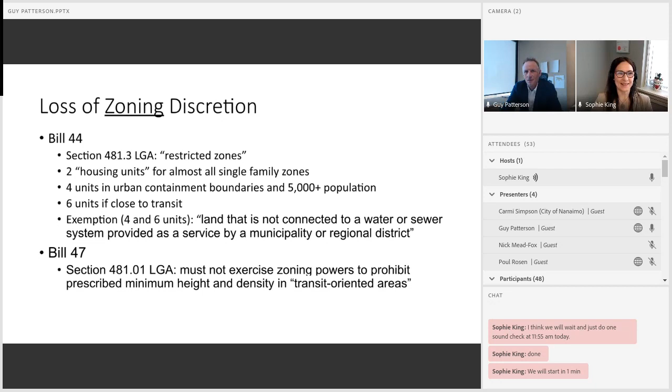Okay, thanks, Sophie. Hi, everyone, thanks for joining, thanks for having me, PIBC. So I did get a chance to look at most of the questions that were submitted in advance, and I'll hopefully try in my 15 to 20 minutes to address the gist of at least some of the questions that I think were most related to the area that I'm qualified to speak about, which is more on the legal side of the servicing and infrastructure implications of some of this new housing legislation, not on the technical engineering side. Obviously, we have others more qualified to deal with those aspects.

Anyway, so yeah, I'll try to focus on, in my practice, in my thinking to date on all this new legislation, what are the challenges, implications, and legal issues arising from the servicing and infrastructure implications of what really amounts to, I think I'm just starting to describe it as a fire hose of new provincial legislation. And now we have, at least as far as it's gotten to first reading, I'm not sure if it's gotten beyond first reading, we now have Bill 16 to add to the mix.

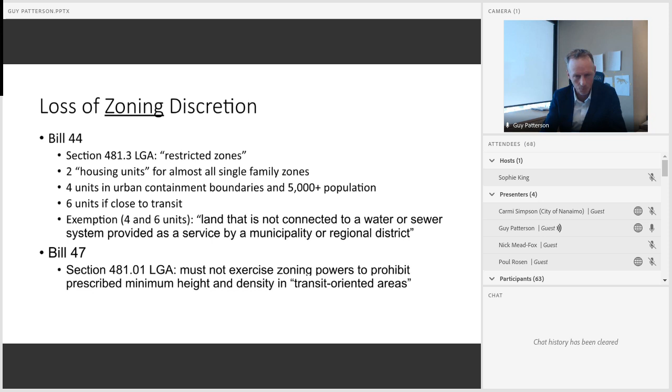So that context, that new context the province has created for planning and land use management decisions in local government, for local governments in BC, raises what I think is really the question that kind of underlies many of the questions that I read in the list.

Which I kind of try to boil down to the question of whether the loss of the zoning discretion that I've tried to describe translates into or necessarily equals a loss of authority to ensure adequate infrastructure and servicing for these new housing units that are now allowed as a matter of zoning.

So I want to emphasize, I underlined in the previous slide, there's the word zoning. My pitch, my theory here, or what I want to emphasize, is that it's only one feature of the local government's broad range of legislative and regulatory powers. It's only one small piece of that bigger puzzle that has been stripped away.

The only thing that these bills are forcing local governments to do is change zoning. No other legislative discretion or authority has been similarly stripped away. So what is left after these new housing unit density obligations is what we want to examine, right?

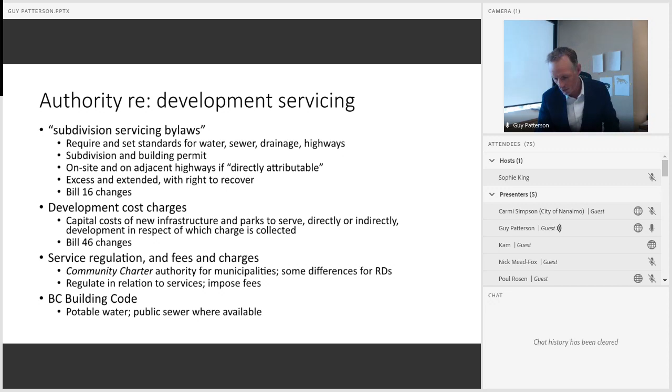So, ask and you shall receive. The legislature is giving you new authority to impose requirements at the subdivision and building permit stage to get more new kinds of works and services, including road dedications, in addition to the underlying authority for water, sewer, and drainage infrastructure at the subdivision and building permit stage. Again, all that comes after zoning.

My last slide: building permits can be refused for non-compliance with all relevant bylaws and regulations, not just zoning. So zoning isn't the only relevant consideration. The removal of the zoning discretion might not be the end of the world. The sky is not falling as a result of the loss of the zoning discretion. It just places a sharper focus and probably requires you to pay closer attention to the exercise of the other kinds of authorities that exist.

I won't touch on the very last question, other than to say I think probably the answer is no - that if zoning is available but works and services are insufficient, I don't think a local government is obliged to rectify the deficiency. The local government can force the developer to rectify the deficiency, or if the deficiency can't be rectified, refuse the issuance of the building permit, even though the zoning would in theory support it.

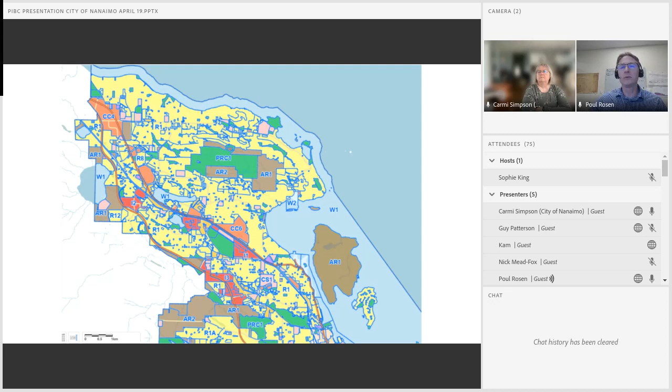Just in terms of background, the city provides water, sewer, and stormwater services to the vast majority of the city. To support those services, we have a citywide sewer model that's calibrated with actual flow information, and its level of detail is down to the parcel level, which is a little unusual but helps us quite a bit. The same goes for the water model. We also have as-and-when contracts with engineering consultants to help run the models and do the analyses for us, so we can go to the right folks and get answers fairly quickly.

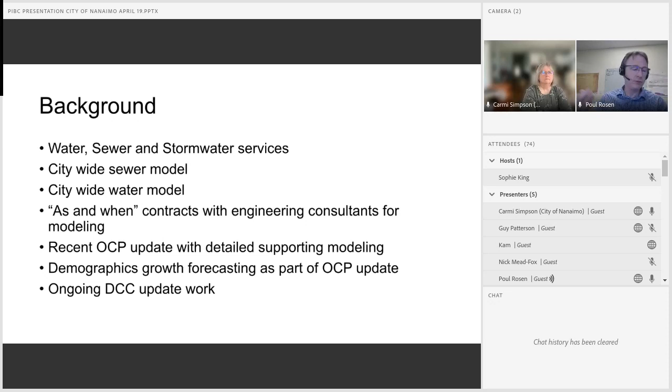So in 2023, we did a fairly major OCP update. As part of that, we did a lot of demographics evaluations and forecasting, and got a good understanding of the infrastructure impacts. So we were well set up to understand the impacts of growth going forward over the planning horizon. We're also in the process of updating our DCC project lists, and that work was fairly mature by the time Bill 44 hit in the fall, so we were well positioned to answer these types of questions.

Our water system has a little over 700 kilometers of supporting pipe and infrastructure. It's worth about $1.5 billion, and it's built over many decades. It's designed to meet engineering standards, and the pipes themselves have asset lives over 75 years in many cases. So these are really long-term assets, and it's not easy to go and replace them or upsize them.

Obviously we provide water for domestic needs, commercial, industrial process, and so on. But one of the key design criteria for the water system is actually the amount of fire suppression water that we provide. For single-family dwelling areas, our engineering standards dictate a minimum of 75 liters per second. Other zoning, like commercial and industrial, has higher flow rate requirements, like 200 or 300 liters per second.

A lot of that is tied back to the requirements under the Fire Underwriters Survey. They're a national organization that provides data and standards for the insurance industry. They periodically evaluate the effectiveness of fire protection services and provide a score that impacts the insurance rates within that area. So the score we get in Nanaimo with the Fire Underwriters Survey dictates how much people pay for their house insurance. It's a fairly important thing that we adhere to their standards.

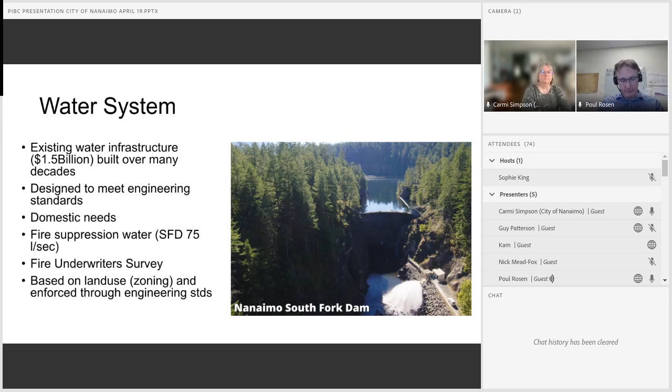Now let's move on to the sanitary sewer system. We have about 600 kilometers of sewer pipes. We provide the collection, we don't provide the treatment — that's done by the regional district. But an important point here is the minimum pipe size in our engineering standards is actually quite big, 200 millimeter diameter pipe, which is 8-inch diameter. It has a lot of capacity, and we do that more for operational reasons, to be able to complete the flushing, the inspection with cameras, and so on.

What that means is in the upper ends of a catchment, where they're like the leaves on a tree, there's actually a lot of surplus capacity in the network at those points. We also have, like I mentioned previously, these sort of pocket areas — some areas where we have low pressure sewers, and this Protection Island, which is serviced in a special way.

It's not just conventional gravity sewer, and with storm sewer, I put storm sewer up there too. We didn't spend a lot of time considering it because in our engineering standards, as part of developments, they are required to match the pre-development hydrograph with their development. So in theory, new developments are not going to contribute in any significant way to increases in storm sewer loading. So that came off the table fairly early on in our evaluation.

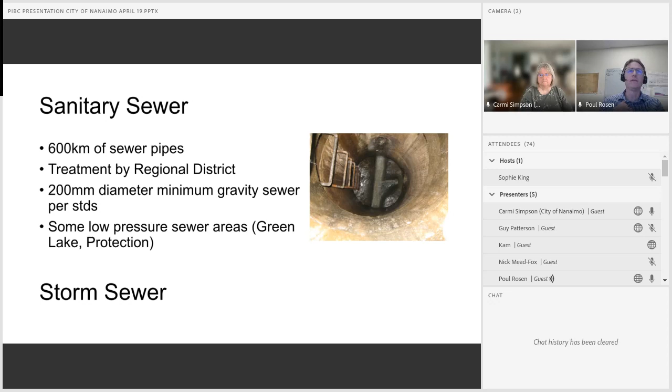So Bill 44 - when it hit, we already had substantial growth planned for. The difference was that the location of the growth was potentially now a lot less focused on urban nodes. Our OCP had envisioned that we would focus our growth ideally around these city centers or urban nodes, recognizing we weren't going to get all of it there, but that was the hope. Now with Bill 44, it could potentially be quite decentralized.

So for water, we ended up taking a theoretical assessment of the fire flow requirements for a typical fourplex on a single family lot. Carmi will get into that in a bit, but around the consequences of not meeting the FUS standard - eventually, if we were to allow developments with FUS fire flow requirements higher than what we could provide through the fire hydrants and water system, we would get a poor score and our insurance rates in town would go up. That was a consequence we were trying to avoid.

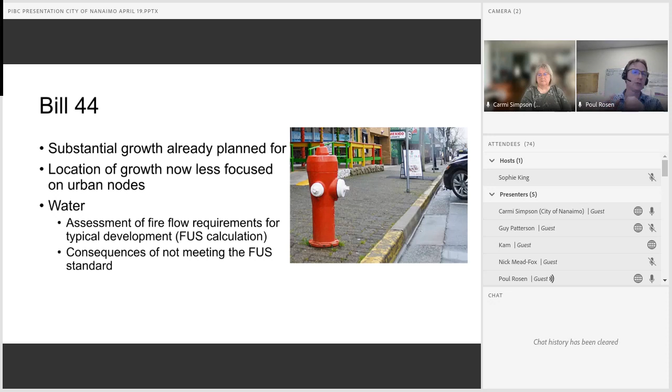So Carmi, I'd like to hand it over to you. I think Carmi's going to talk about the findings and the technical analysis, and then I'll come back at the end and we can talk about the summary. Okay, thanks Poul. You covered most of it - I could just probably go home now.

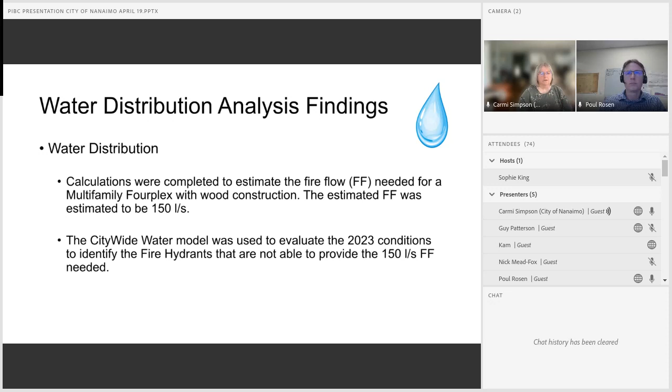For water distribution, like Poul was saying, the key part is the fire flow needed to support the fourplexes being proposed to be built on single family dwellings. We did a generic calculation of what a wood construction, worst case fourplex would require, and it came to around 150 liters a second. It would only take one fourplex within the area of a fire hydrant to have an impact. So we calculated the different areas within the city where fire hydrants weren't able to provide the 150 liters a second, and identified those as high risk parcels.

That ended up being only about 30% of our parcels. We've got a fairly robust water network within the city, so we only have about 30% of the eligible parcels for single family development that would be considered at risk. But that didn't stop the buck there.

We said, well, because there are things like Poul suggested - you can change your design, or do whatever upgrades are needed downstream or upstream to support improved fire flow where that fourplex is being built. So our approach was that if somebody came forward with a development application for a fourplex, they needed to provide an FUS calculation to find out what's required. There are lots of areas that aren't a problem, and if there's available fire flow just under the 150 and it meets that criteria, they don't have to do anything. If they need more, they can either do the upgrades or redesign the project to lower the FUS to whatever is available.

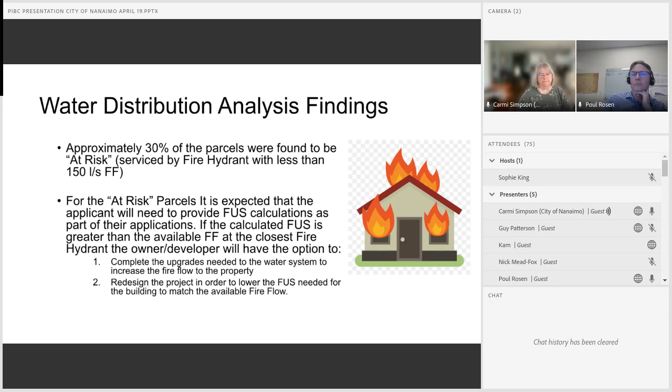For the sanitary sewer, it's a bit different because it's a network that's cumulative - stuff that flows from upstream flows downstream, and the flows get bigger and bigger as they go down. This is where Bill 44 threw us in a loop, because we had spent a lot of time looking at where the planners thought growth should occur in these high density nodes, and then looked at what happened to the network. This time, we had no idea where the growth was going to happen.

So we just said, let's have a look at what would happen if every single lot had a fourplex on it, and then see what it looks like. And if it blows up, we'll have to go back. So we called that the extreme scenario. Then we split out what we had already, because we had a lot of growth already baked into our OCP update, so we just wanted to see what incremental difference Bill 44 would make.

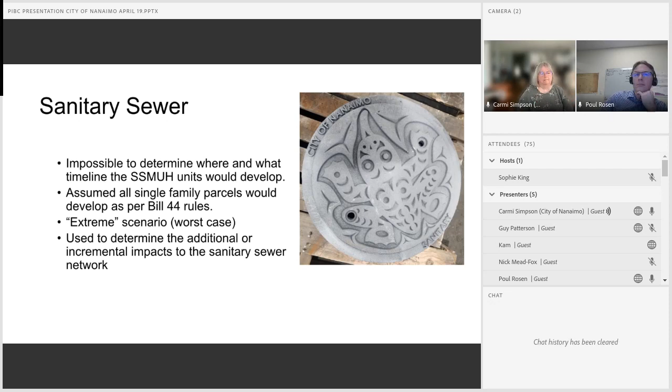So in that, at the end of the day, out of our 600 kilometers of sanitary mains, only about 12 kilometers were identified as deficient. And out of that, 90% are actually in scheduled projects we've already identified through other means that need to be done. So there's maybe 10% of these deficient pipes that need upgrading, and they're scattered throughout the city.

So we update both our citywide sanitary model and our water model as well, on a 2-year cycle. The likelihood of all of this stuff blowing up and getting built all at once is not going to happen. So I think we've got time to just monitor it, see where the trends are going, see if there's an area with a lot more activity, then we can create projects to address any pinch points downstream.

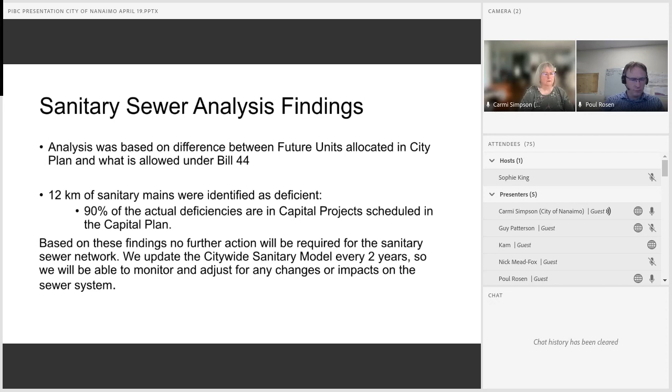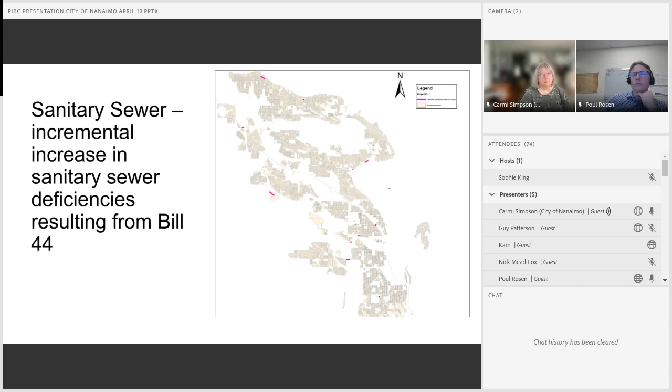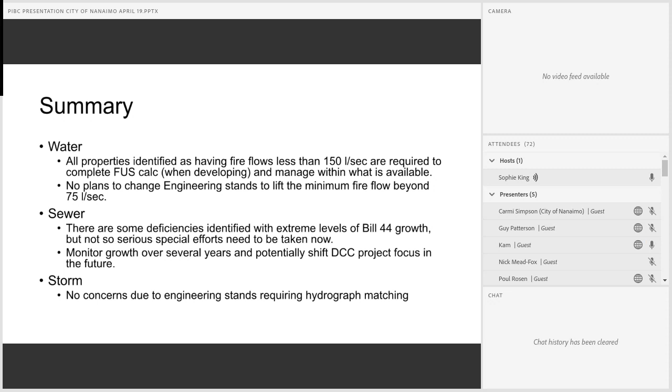Kam, are you able to join us? I know you had some issues earlier. Oh, we can hear you. My camera's turning on now. Oh, there I am, okay, it might take a moment. Camera turn on, there, oh okay. You're good to go, thank you very much.

You're welcome. Good afternoon everyone. My name's Kam So, I'm the current Director of Public Works and Utilities for the District of Lillooet. I've been in my job for 6 months, and it was interesting to hear what the City of Nanaimo was doing with their infrastructure servicing requirements, because I would say we're the exact same, except for a smaller scale, and we're completely different in every way.

In this presentation, I'll be talking about the service requirements, especially concerning water, for new dwellings in a small town.

As I said, we're the exact same. Lillooet's the exact same as Nanaimo, only that instead of 200,000 people, we have 2,000 people with a population that has been shrinking over the past 20 years.

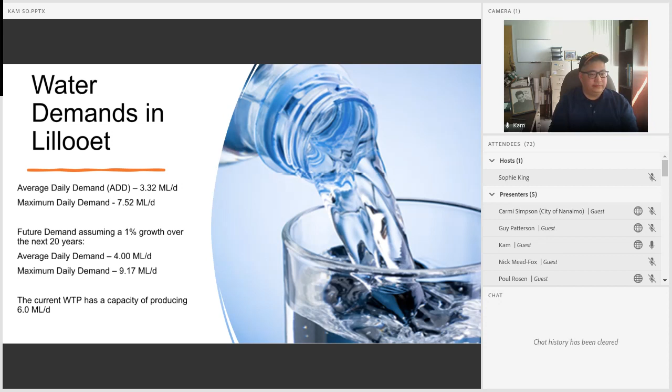We have a number of wells around town that can supplement the production of water, most noticeably at the recreation center, which in the months of July and August can draw 6.2% of our water usage.

The limiting factor of water production is our filtration system, which produces the 6 megaliters of water a day that we need.

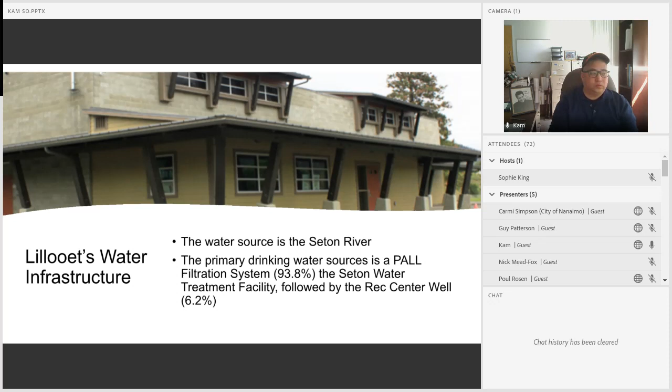The combined storage of our entire town is from these 3 reservoirs. The top one is known as Town Creek. The one on the bottom left is known as the Million Gallon, which holds 1 million gallons. And Dickey Creek, the underground bottom right reservoir, can hold a combined total of 7.5 megaliters a day.

If the power goes out, we have 1 day's use of water which we can store, or about 18 hours.

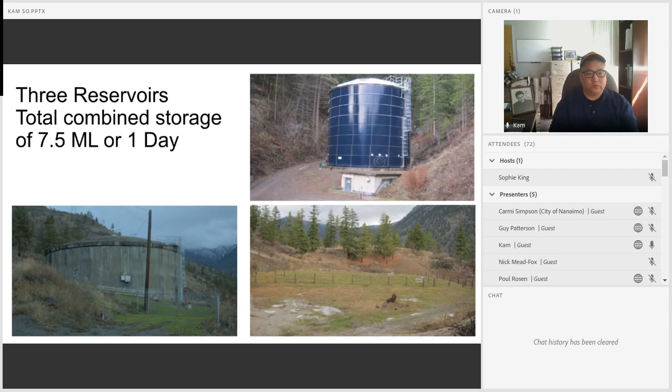Our distribution network is, unlike Nanaimo, where they have hundreds and hundreds of kilometers, we have 32 kilometers of pipes, which were all built in the 60s.

It is a combination of asbestos pipes, cast iron, steel, ductile iron, and parts unknown, which is probably asbestos or ductile iron. We slowly replace 1 or 2 lines every 5 years with new PVC pipes.

So needless to say, a lot of our water wastage, or the reason why we're using so much water, is because of our distribution system.

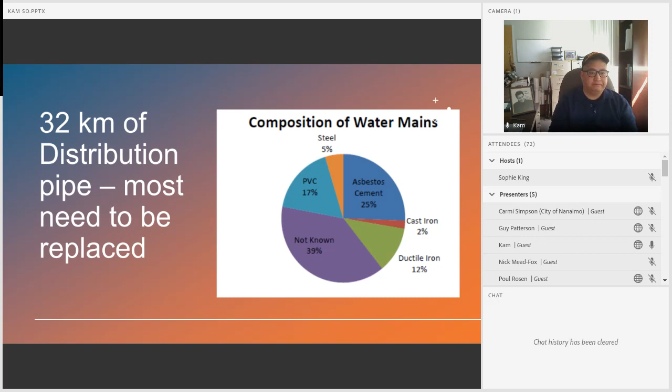Unlike Vancouver or Nanaimo, our capital budget is a little different in scale, in that this year we have a capital budget in total of $200,000, which is for the water treatment plant, the distribution network, and all our pump stations - which is not much.

Our asset financial management plan recommends that to replace like-for-like for continued life cycle costs, we should be spending $675,000 a year. With that being said, if we had a budget of $675,000 a year at our current capacity, we'd have a difficult time.

We have a few internal problems at the moment, which I don't really want to get into in this presentation. But even delivering a $200,000 capital plan with our current capacity would be proven difficult.

So as the first presentation with Guy Patterson, we talked about the service requirements for new subdivisions. My basic responsibility is that we have a subdivision and development servicing bylaw that all new developments have to follow if they want to get a building permit. As director of engineering, it's not my purview to deviate from the servicing bylaw, we enforce it. The Public Works Department reviews all proposals with respect to servicing, including roads, water, sanitary sewer, and drainage, and it has to meet the minimum service requirements within the bylaw.

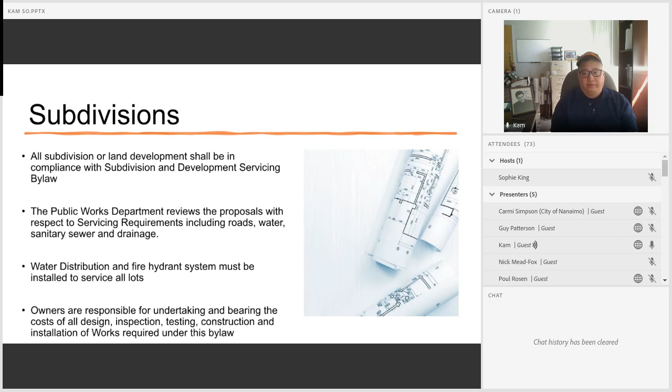So to give you some examples of subdivision building permit requests that came through my office: there was a property in Lillooet that they wanted to subdivide into 3 separate properties. When they separated those 3, the finished project wouldn't meet the fire flow requirements of the FUS requirements. To meet the requirements, they would need to upgrade their water line from their property to the lift station, or to the PRV, the pressure reducing valve, which is about 144 meters away. At $500 per linear meter of water line, we estimated that would be $80,000 for the upgrade of the system if they wanted proper fire flow.

So with that, the developer could decide if they wanted to provide the $80,000 to upgrade the system to subdivide their property, in which they said no.

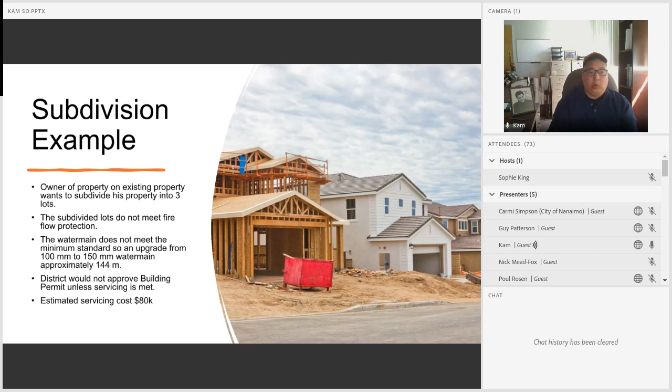The other example I wanted to bring up was a request for development of a 17 lot subdivision on the other side of the Fraser River. The Fraser River cuts the town in half. On the left-hand side we provide services, and on the right-hand side, where Highway 12 is, we do not provide services. The water line does not go across the Fraser River as of yet. There are some houses on that side serviced by wells, and the number of wells they have are very deep, and in some places the arsenic level is too high for drinking consumption.

So development on the right-hand side of the river has been limited. There is a requirement to have servicing if they want to build houses, but they can get a variance because it's not available within the bylaw, and they're allowed to find other sources of water. But for where they want to build their subdivisions, wells would be cost prohibitive to service those 17 houses. So one of the thoughts with the developer was that they wanted to deliver water from the water treatment plant, building a water line attached to the bridge across the Fraser River, across 3 kilometers of road right of way to service their properties.

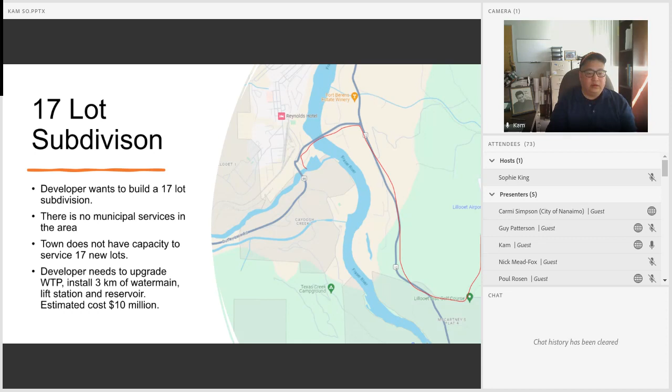So with that being said, the municipal objectives of the District of Lillooet include supporting sustainable housing, but with our current servicing, it is difficult to allow new development of houses based on our subdivision bylaw. We just have too many issues where we can't deliver the services that are needed for new development.

As a result, there have not been too many new houses built in the last 20 years. I talked to the building inspector and asked him how many building permits we had for new houses, and we get on average 10 a year. With that being said, I don't see too many houses, so I don't know if those building permits went anywhere. So between 0 and 10 houses are built every year. And that is the end of my presentation.

Thanks, Sophie. Thank you, Kam. Wow, so many roadblocks for your community. Thank you for sharing that information with us.

So we heard from a representative from a smaller community. Now we will go to someone representing a large urban center. We have Nick Mead-Fox, Senior Engineer with the City of Vancouver. Hi, Nick.

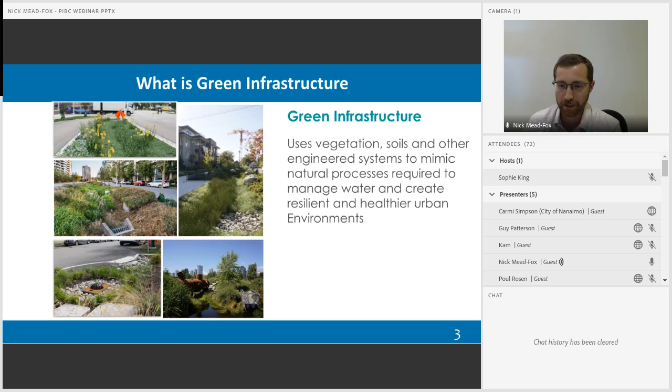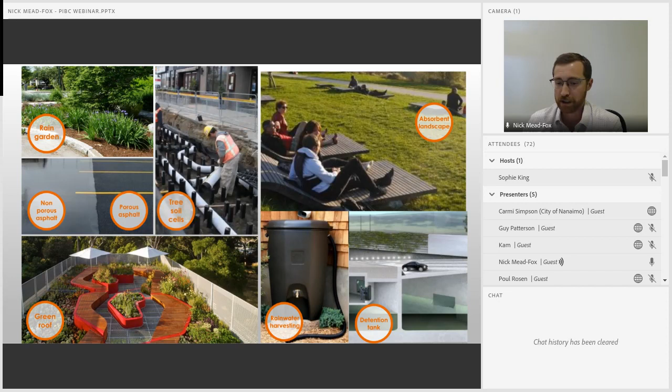It can look like a whole bunch of different things, different sizes, different types of systems. We have green roofs, rainwater harvesting, large detention tanks, rain gardens and absorbent landscapes, permeable pavements, or rainwater tree trenches. All of these are really aiming to restore some of the features and services provided by a natural water cycle. In a densifying area, these are essential services like getting water out of our sewers, decreasing urban heat, creating stream flow, and creating a more enjoyable community for the public.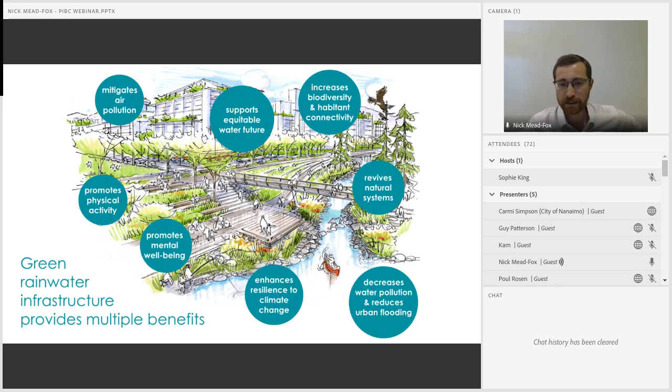All of this is about thinking strategically about adapting for the future. That's really what green infrastructure can do—supplement our existing storm sewer systems so we don't have to replace all of these storm sewers at once. So it really is about responding to the climate emergency. As Guy mentioned in the beginning of this presentation, Bill 44 apparently has provisions to promote these actions. Green infrastructure helps with densification, servicing expansion, and creates ecosystem health and service benefits.

It's really this growth in aging sewer and drainage infrastructure that is driving GI in the City of Vancouver. In areas where we've installed sewers recently, they do not need to be replaced, but we're already finding that they're undersized. That's where green infrastructure can come in to fill that gap.

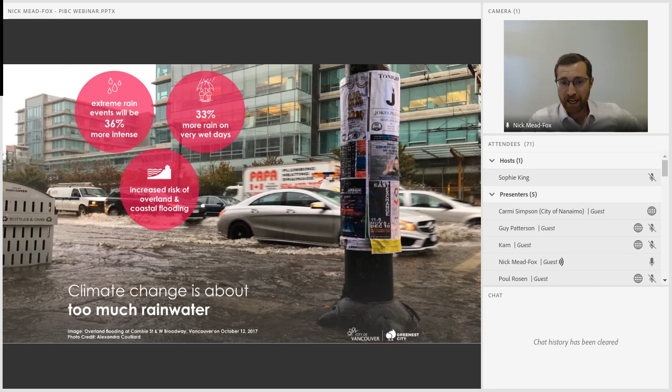We're also expecting way more rain with climate change, and unfortunately more drought too. We have found through a lot of our modeling efforts and monitoring of our systems that we can use green infrastructure to make up for this additional rainfall from climate change. In terms of heat reduction, this is also a huge driver of green infrastructure now. We had one of the largest mass fatality events in Canada in 2021, and we need more tree canopy and more green roofs to try to keep the city cool during these summer events. And of course, growth in utility servicing.

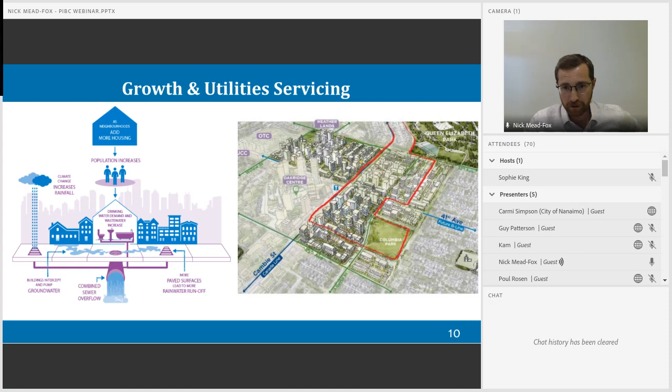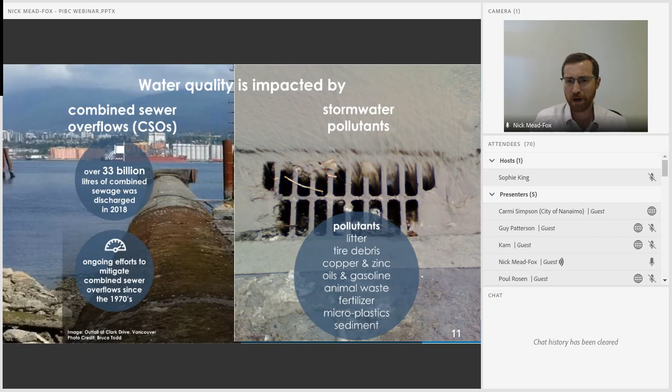I'm going to go fairly quickly through some of these slides to make sure I get to the more interesting content. Green infrastructure is great for water quality, for removing pollutants from streams. In the City of Vancouver, we are very serious about all of this—we currently have about 332 green infrastructure assets managing a decent amount of rainfall throughout the city.

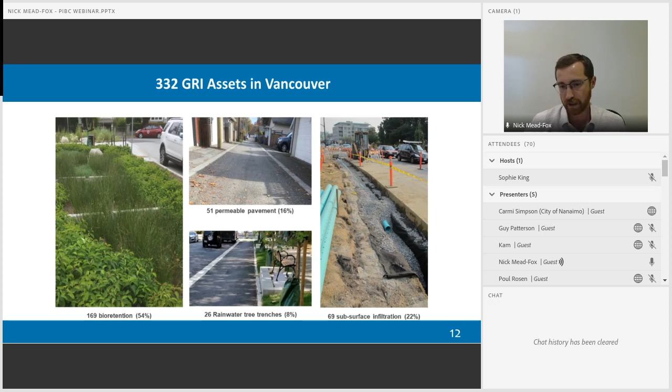What you see here on the left is sort of our bread and butter system, bioretention or a bioswale, where you're just filtering water through plants and vegetation and then sending it to the storm sewer through an under drain or through a catch basin overflow.

From some of our modeling work, which we've confirmed through monitoring of our actual systems in the ground, we can infiltrate a little over half of annual volume that gets directed to these systems. That big orange slice there is the catch basin inflow through those under drains that I mentioned. So that water is still cleaner than the water that would be if you were just sending it directly to the sewer system. It also slows down the flow into the sewer system, and when it comes to flooding and sewer backflow, that delay can be really important to distributing the flow and making sure our sewer systems have sufficient capacity.

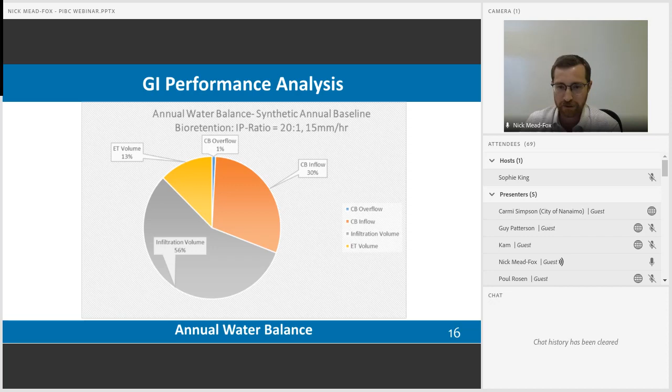In terms of design storm impact, which is really what our sewers are designed for, our modeling and the associated monitoring of these systems has shown that a well-designed green infrastructure system that takes up around 10% of the contributing catchment, which is pretty large but it's also less than taking up the whole boulevard space, can manage a 10-year, 1-hour projected increase for 2100 level rainfall patterns. So this is just demonstrating that even for these really highly intense storms that we're expecting from climate change, green infrastructure can make up this difference so that our current pipes are still sufficient under these scenarios if they're supplemented with green infrastructure.

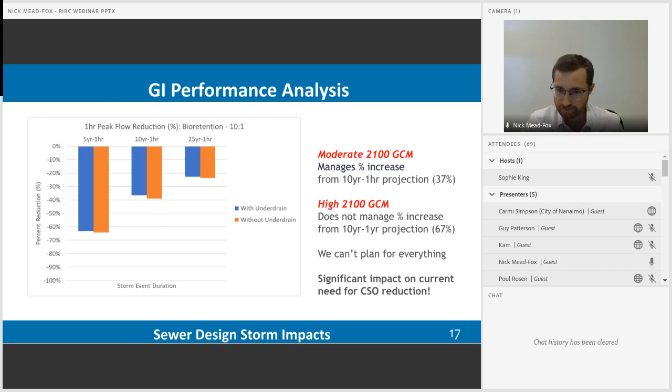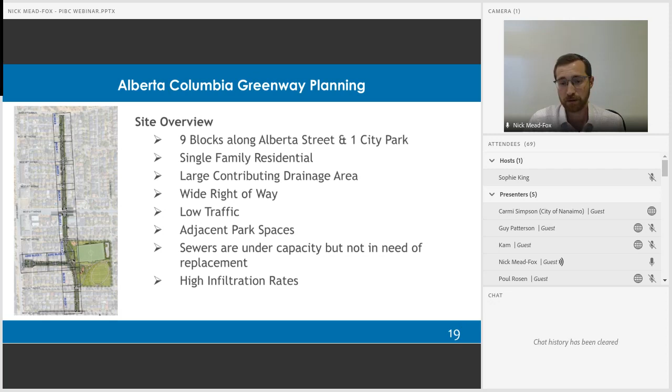So I'm going to talk about a quick case study here in the city of Vancouver. The Alberta Columbia Greenway, which you can find more information about on our website, is a large green infrastructure plan which is sort of a perfect storm of an easy area to implement green infrastructure. It's about 9 blocks of single-family residential homes, there's a large contributing drainage area, it's a pretty wide right-of-way, low traffic, there's adjacent park space, the sewers are under capacity but they're not in need of replacement yet, and there's really high infiltration rates, so we can send water into the ground and towards the groundwater fairly successfully here.

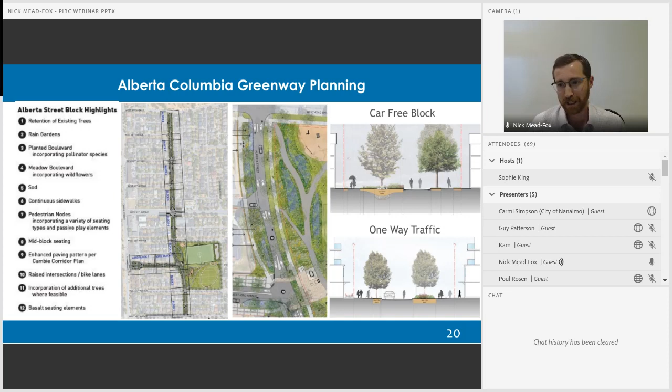And we've integrated it with adjacent park space. We've managed to have some car-free blocks and one-way traffic. And this type of system is again meeting this need for some additional sewer capacity without needing to replace everything that we currently have in the ground.

So it's not always that easy, unfortunately. This system was a pretty no-brainer solution to a pretty pressing problem, but there are some tips for everyone for planning for green infrastructure under harder circumstances. So I've tried to split up these recommendations into policy initiatives and technical resources.

For policy initiatives, the big ones are identifying your policy barriers to green infrastructure. A lot of these are things like foundation and utility setbacks, prohibitions against ponding in right-of-ways, or very small minimum boulevard widths. We found that anything less than a 2-meter boulevard, it's pretty hard to implement green infrastructure in those areas. It's also helpful to have some examples and templates for implementation expectations to show developers and city staff what we're looking for. And then allocating space within the rights of way, making sure that you have both surface and subsurface space allocated for that subsurface water storage component of green infrastructure, and having standardized development and rezoning conditions for developments in higher density areas.

And on the right, this is the more technical resources for engineering divisions, all of the standard engineering guidelines that you would have for any other infrastructure system, you need for green infrastructure too. But because it's new, most municipalities don't have these yet. However, the City of Vancouver does. We have pretty good sets of these resources for everyone, so please feel free to reach out if you'd like to discuss any of those.

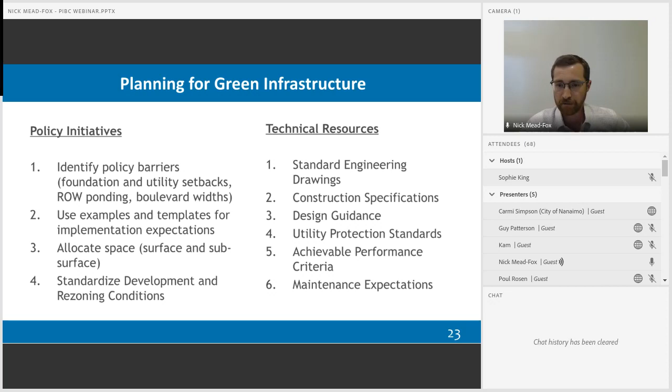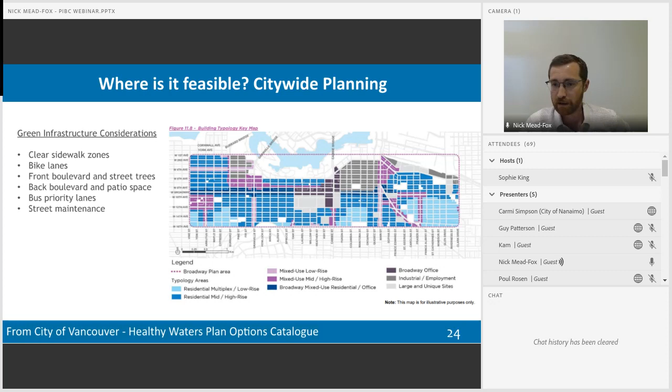In terms of determining feasibility, it's helpful to look at this from a bunch of different scales. The first is the citywide planning level. You want to look for areas with clear sidewalk zones where bike lanes can easily be incorporated with green infrastructure. You need some front boulevard space and street trees, and it's helpful to have a back boulevard too for more subsurface storage, making sure those areas are amenable to this additional space requirement.

The other scale that's helpful to think about is the building typology scale. The City of Vancouver recently completed a large assessment of different building typologies and how green infrastructure can be incorporated into them, so we have some templates surrounding how we can fit all these features in and meet our rainwater management requirements.

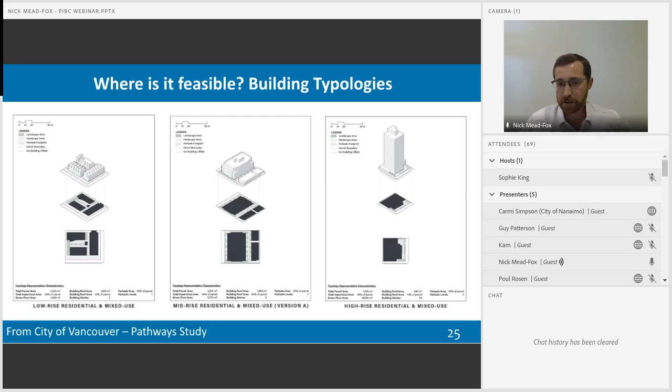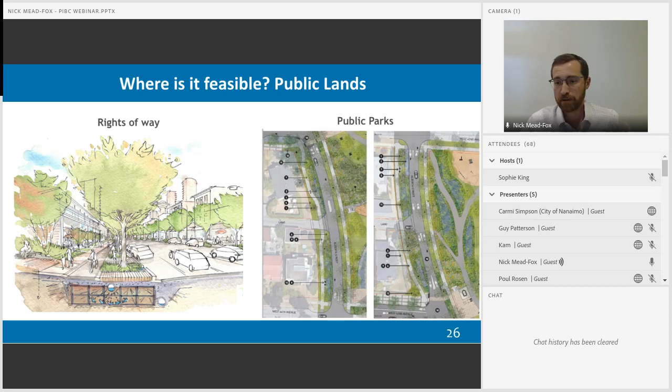In terms of development conditions, it's helpful to distinguish between conditions for adding green infrastructure to the frontages of the lots on the right-of-way, and to coordinate with your parks departments to figure out where you could use some of that park space for rainwater or stormwater storage.

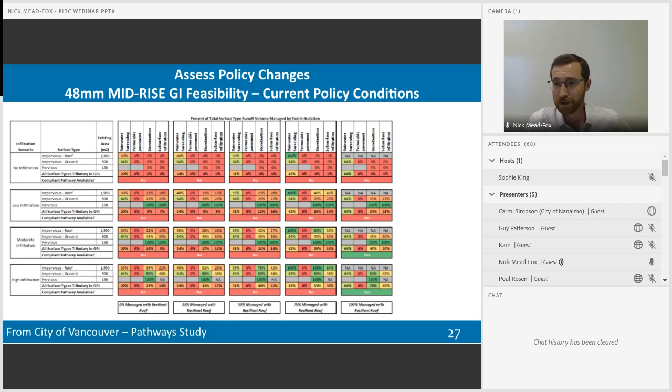In terms of policy changes, these things are very impactful. The pathway study I mentioned before looked at all these different housing types and assessed the potential to meet our rainwater targets under current policy conditions. All these scenarios are shown here, and you see a lot of red because we couldn't meet our policy requirements under the existing regime. But by modifying some setbacks to foundations for infiltration and reducing parkade requirements, a lot more of these scenarios become feasible.

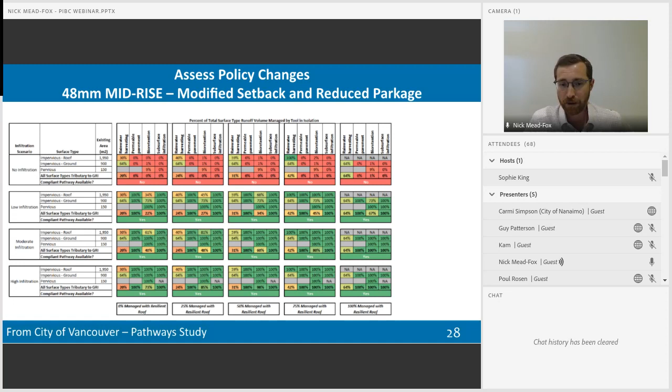In terms of major takeaways I want everyone to take from this presentation: first, GI can help accommodate the densification that's going to be required. The infrastructure benefits for stormwater servicing and heat reduction are well proven, along with community benefits like creating more green space, more walkability, and more habitat space, which most people in cities appreciate as they get more dense.

Expanding the right-of-ways wherever possible really helps make GI more feasible. It reduces conflicts with other utilities, creates physical space for green infrastructure, creates space for wider root spread for street trees, and helps with flood prevention. The key components are creating wider boulevards and sidewalks, which can help address those utility conflicts, space, walkability, and flooding.

It's important to remember that our roads are also our major system floodways. Under large storm events, our sewers are not designed for those, and roadways provide essential pathways for water to get away from properties.

The next major takeaway is that formalizing development and rezoning conditions, and providing security, transparency, and consistency for developers, is essential. It's helpful to have conditions that require developers to contribute to road improvements and on-site green infrastructure needed to accommodate densification from developments. It's also important to provide support for developers and engineering consulting firms with technical engineering standards and maintenance documents, to support implementation reliably and effectively.

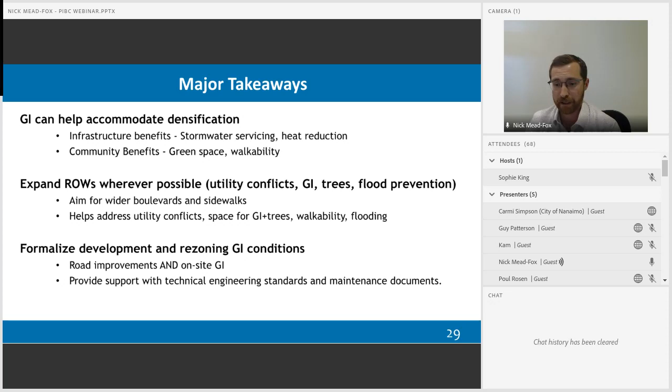More specifically, increasing property line setbacks to foundations and parkades creates more opportunities for private and public GI. Lot line development leaves no room for infiltration, and it doesn't always create the type of community people want to live in.

Finally, GI cannot go everywhere. I've spoken a lot about the benefits here, but it's important to recognize that GI works where it is environmentally and technically feasible. If you have a really high groundwater level, no infiltration rates, and a mandate for extreme lot line development, maybe it can't go there, and you need some alternative compliance option for wherever it isn't.

That's it for my presentation today, and I'll pass it back to Sophie.